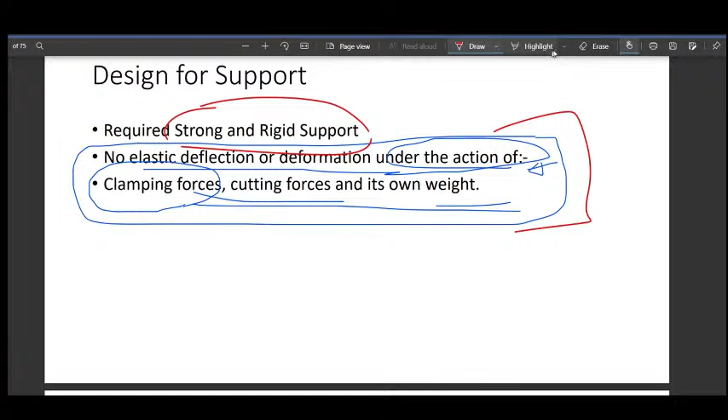Earlier we have studied about the positioning system. If someone is waiting in the lobby, please unmute and ask me to join. I accept, no one is here.

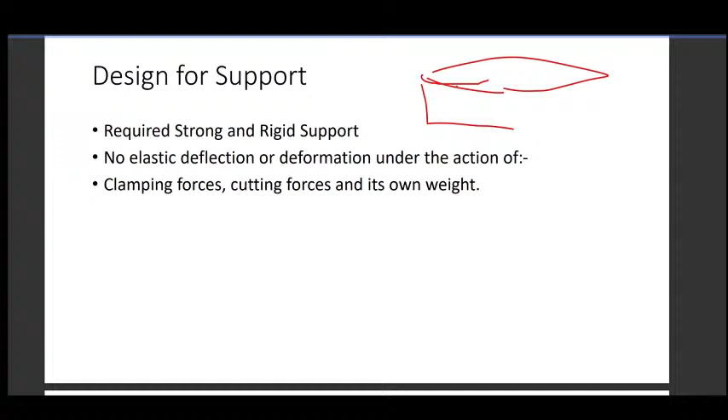So, okay, let's take it this way. When we are machining the part, obviously we have to hold it before machining. Where do we hold it? On the work table. It is not like simply we put the part and we are done. No, we have to put the part at the right position, in the right orientation.

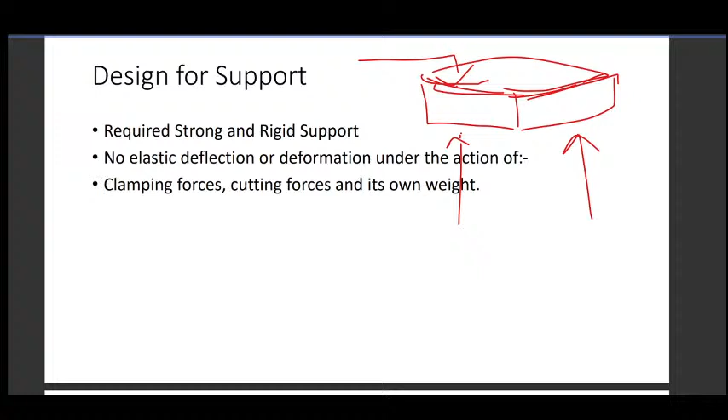We also need to have a strong and rigid support, because when we do our machining, there are cutting and clamping forces involved, and due to that, if the part is not that much rigid, it will deform or deflect. Elastic deflection or deformation under the action of cutting or clamping forces, we have to avoid. There should not be any deflection or deformation while cutting. If it is happening, we have to redesign our support system.

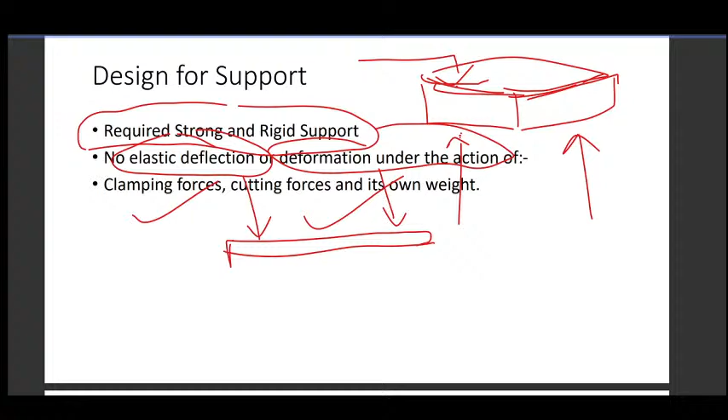That's why we need to design a strong and rigid support so that we can do our machining. Okay, so next, as we have already studied, there are some basic principles, guidelines we follow while designing the support system for a fixture.

In the fixture, the supporting at the bottom surface should be done by at least 3 points. So there are numbers of fixtures, and minimum 3 points should be there to support it. You can have more than 3 points, but you need to have a minimum of 3 points.

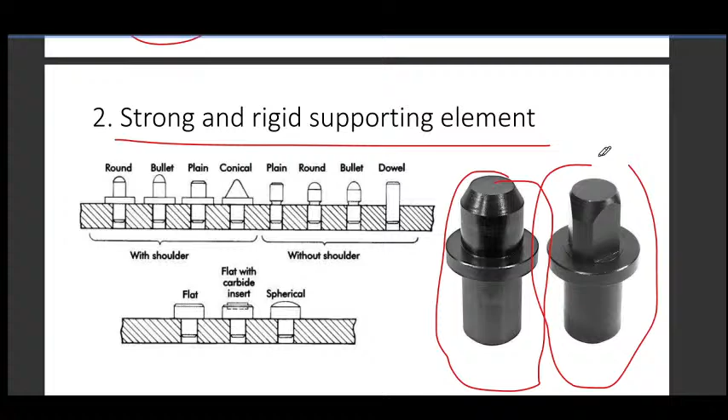Then next is, a strong and rigid support element we need to have. These are our supporting elements, pins - fixed pin and adjustable pin. They come in various shapes and sizes, with shoulder, without shoulder, and then flat, spherical.

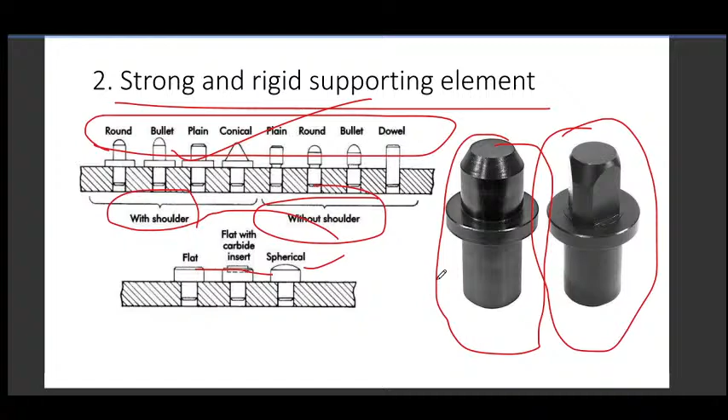So second point, strong and rigid support element we need to have. Then, unsupported span should not be large to cause sagging.

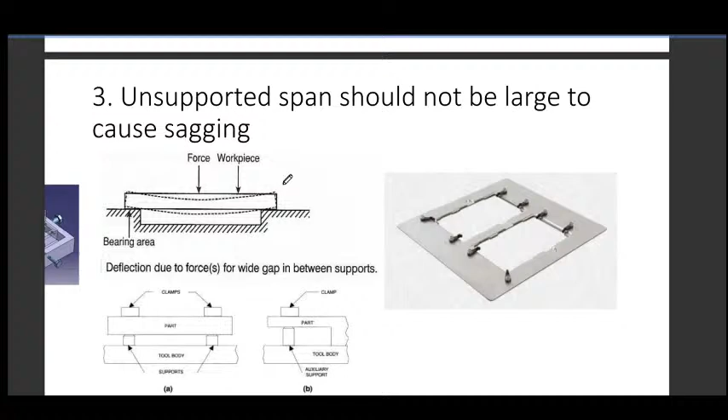There are like this - this one is small, like a PC board, printed circuit board. This one is small. But if it is large and you apply a cutting force here, sagging happens due to self weight. And again, if you are applying a cutting force, it will deform like this. So to avoid it, we need to design our support system in such a way that there should not be any deflection this way. So this is sagging due to cutting forces.

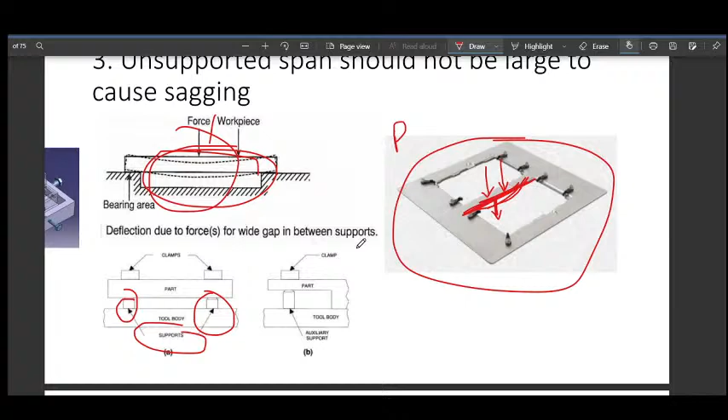So we need to put the support element pins at the right place. As you can see in this part, we have created support here, a clamp from the top. So this one is the fixture. This one is the tool body as a fixture, and this one is your workpiece. So you can see the support system here.

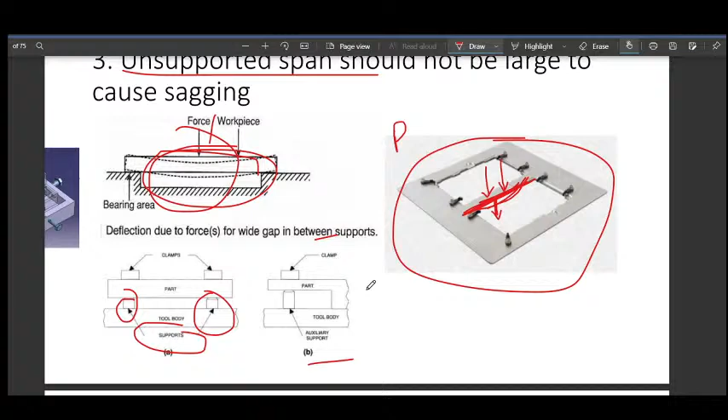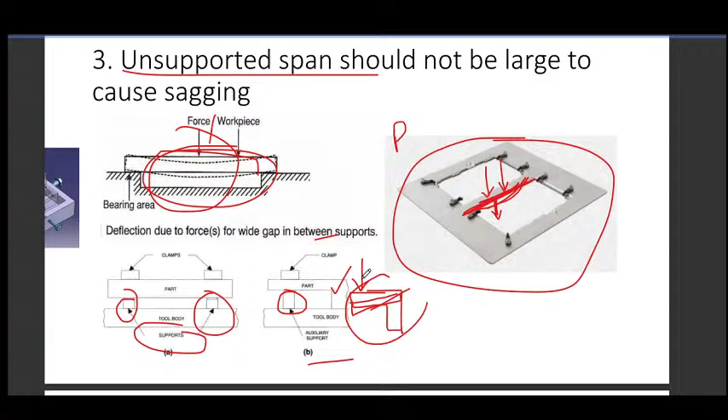Unsupported span should not cause this. If we don't support it here, what will happen? If this is the kind of your job, hanging type like this, what will happen if you don't use this support? Obviously, due to cutting forces, it will undergo deflection. So that is avoidable - we need to avoid this. That's why you need to design a strong and rigid support here.

Next, supporting should keep the blank in a stable condition. So if you have designed this way, with two supporting pins, and we are applying force here, what will happen? It is not stable. So it is not correct - unstable.

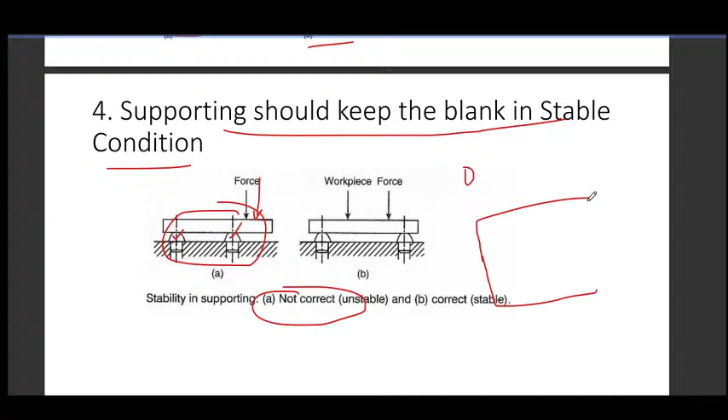And if we have redesigned our supporting pin, that is stable. If you remember, in one discussion, there was a location, a plate like this, and we had already designed it. It was two pins here and here as supporting pins, but when it was redesigned, the location of this pin was shifted to here, if you remember.

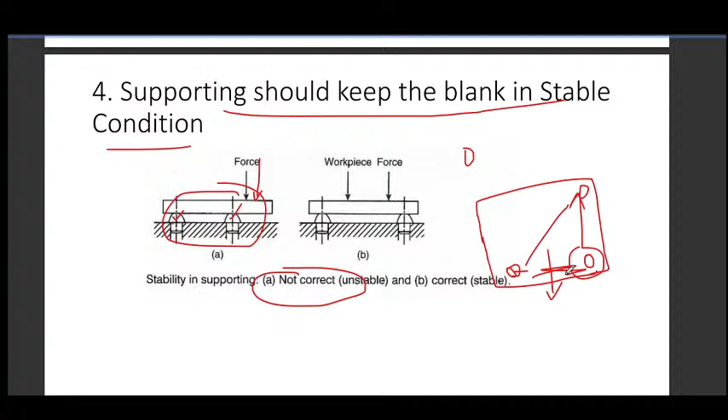So that was the concept of location of the pins - that pins should be as far apart as possible. That was the concept, that pins should not be very close, as you can see here. So this one is the correct method.

Then, a large flat area or proper recess is to be provided for better and stable support. This recess you can see, and here you can see space - that is termed as a recess - and here you can also see the space, this much gap.

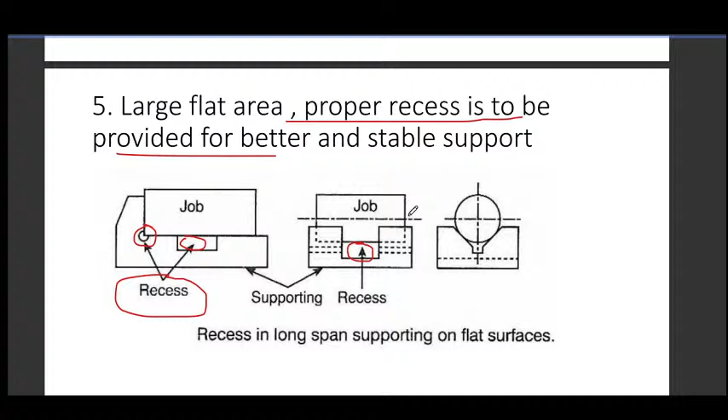Okay, so when the parts are long, you need to provide the recess, as well as when there is a flat, you need to give a recess around the corners, because sometimes the corner cannot be at a right angle, and that will cause disturbances in supporting. Because if this one is taper, suppose this one is taper, what will happen?

You know what will happen? There would be a mismatch in the dimension, location of the cutting tool, and that will cause the defect piece to be rejected.

Next, as you can see, cylindrical job should be placed on the V block. As you can see, V block, so there is a gap. What is the advantage of using a V block? It automatically aligns the central axis parallel to the V block axis.

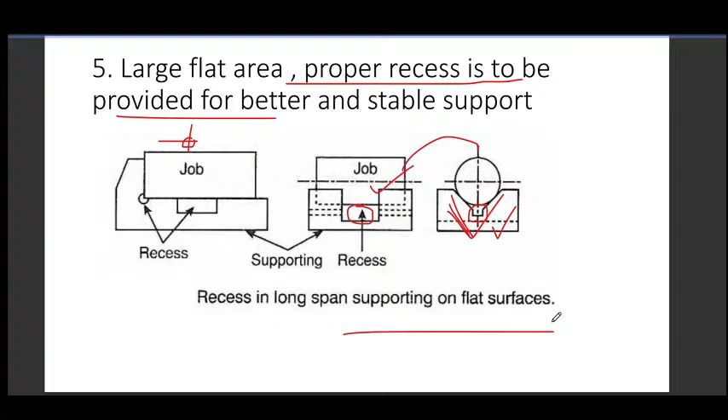Rounded cylindrical workpieces should be supported on a V block. As you can see, this one is a V block as a vice. V block, clamp with the vice.

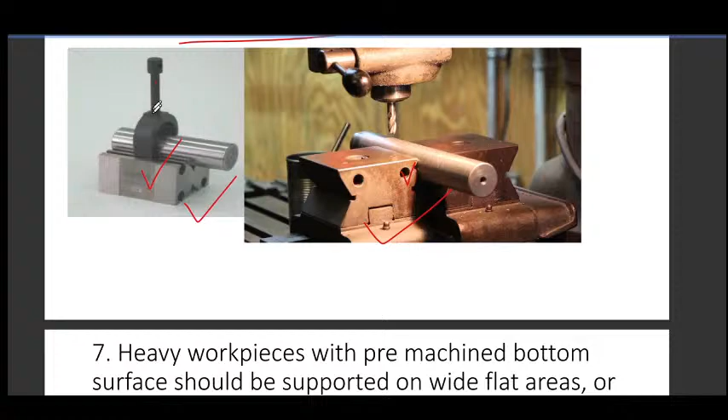Next, as you can see, a heavy workpiece with a pre-machined bottom surface should be supported on wide flat areas or on flat-ended strong pins or plug. As you can see, if the part is flat, it should be supported on this.

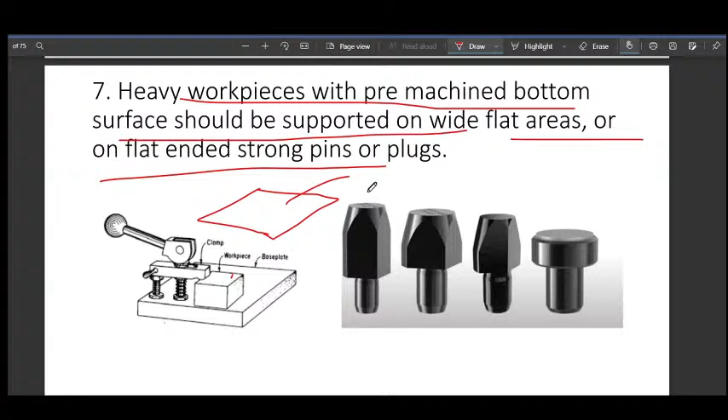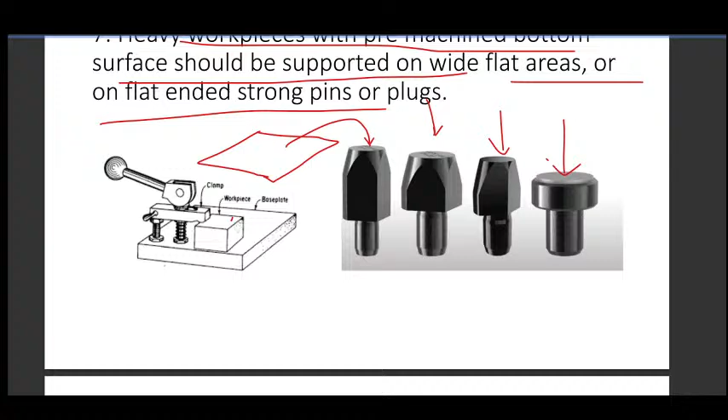It should be supported on the flat end of the supporting pins. So it's not only flat, it should be wide, not small. We should avoid something like this because the top is very small, so it should be wide.

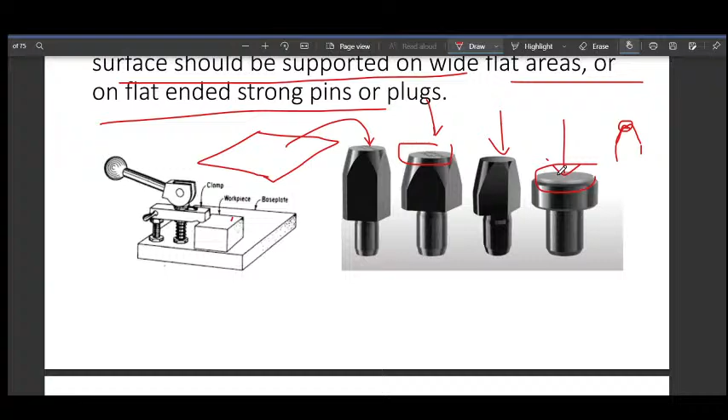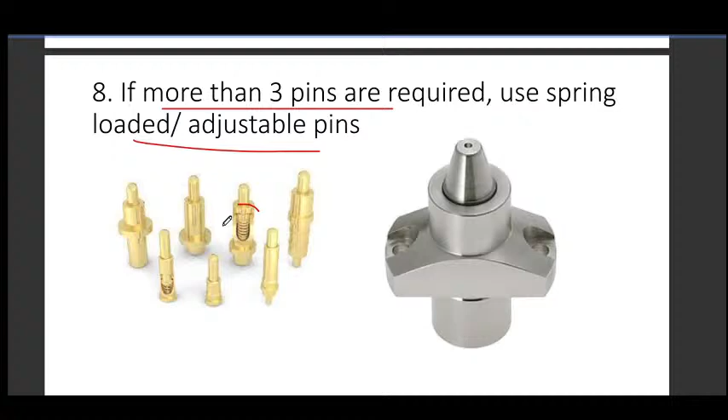Then if more than 3 pins are required, use spring loaded adjustable pins. This is, as you can see, spring loaded adjustable pins. The same thing I have shown here, spring loaded. What is the advantage? This can give you the ability to adjust the position of the workpiece. So spring loaded or adjustable pins are advantageous when there are parts of varying size.

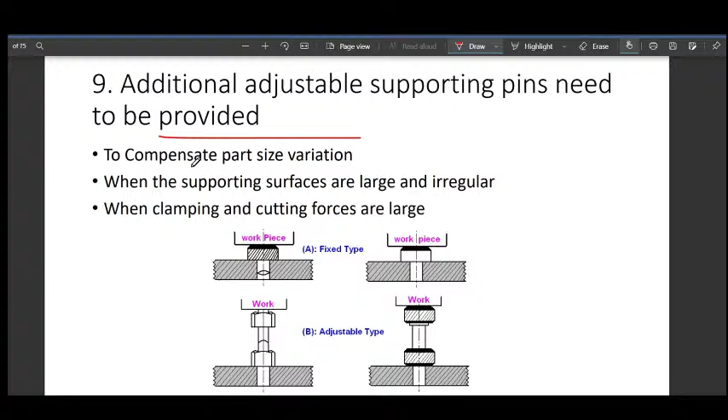Adjustable supporting pins need to be provided to compensate for part size variation, because if one part is longer and one is shorter, how do you support two different parts of different sizes with the same fixture? That's why adjustable supporting pins are used. When the supporting surfaces are large and irregular, obviously we cannot have a fixed pin, so adjustable should be there.

And when clamping and cutting forces are large, when you do machining and the cutting force is very high, you need adjustable pins so they can accommodate the shock provided by the cutting tool. If cutting forces are very high, the adjustable pin can absorb it.

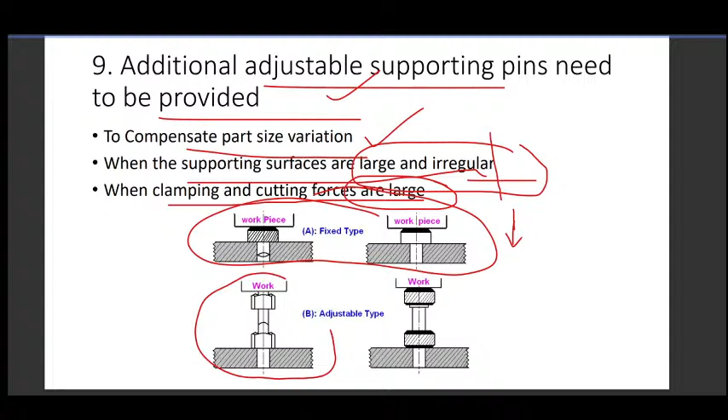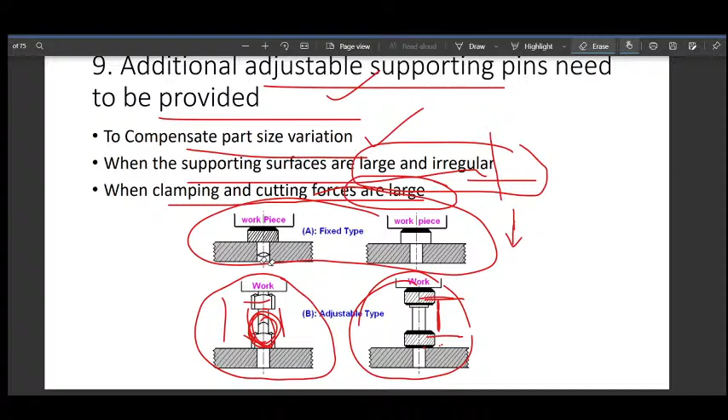As you can see, at the top this one is fixed type, and this one you can see is adjustable type at the bottom side. These two are adjustable; we can simply rotate it using these two screws and change the height of these two top flat ends. Here again we can rotate this nut and simply change the height. It is like a concentric cylinder mating inside, and when we rotate it like this, it will move and change the position of the top flat end. I hope it is clear.

Then ring or disc type jobs should be mounted on the mandrel. As you can understand, if the cylinder type job is there, this should be mounted on the mandrel. That's why ring or disc type jobs should have our mandrel for this type of job.

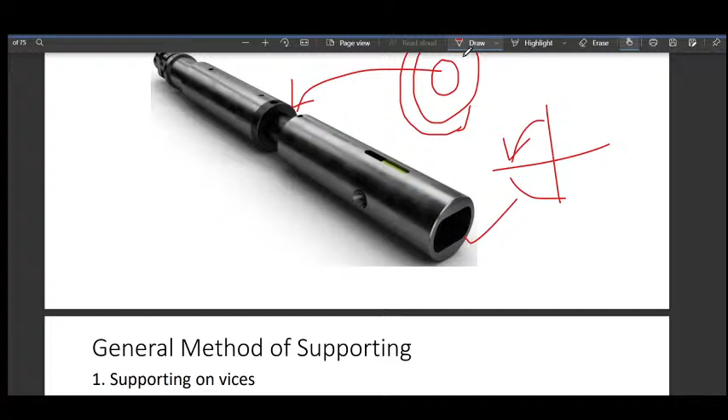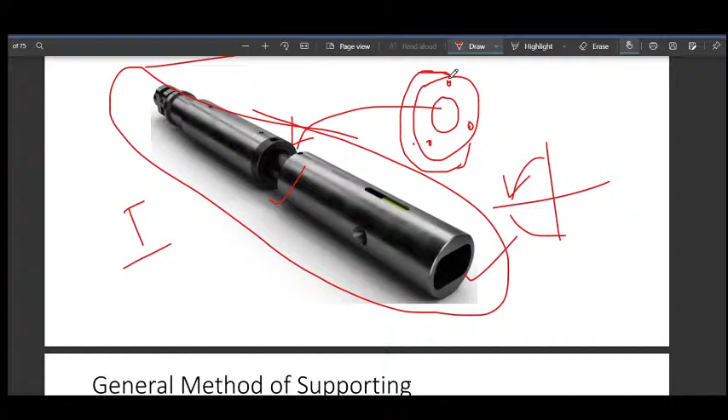Next, this one is a special kind of indexing mandrel that can rotate at an angular position like 90 degrees, or if you have to drill say 3 holes here, here and here, we can easily rotate it. I took this picture for the indexing mandrel, it's not given for how many holes specifically; I am just stating the example that a mandrel can be used for indexing. Like if you have to drill 3 holes, the mandrel gives you the opportunity to rotate the part 120 degrees for each hole, in a single step.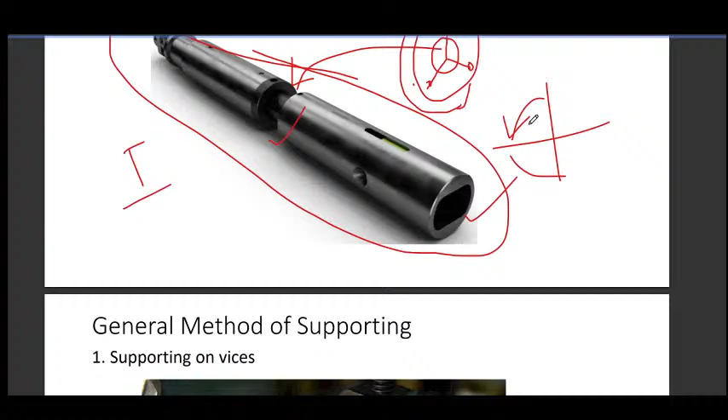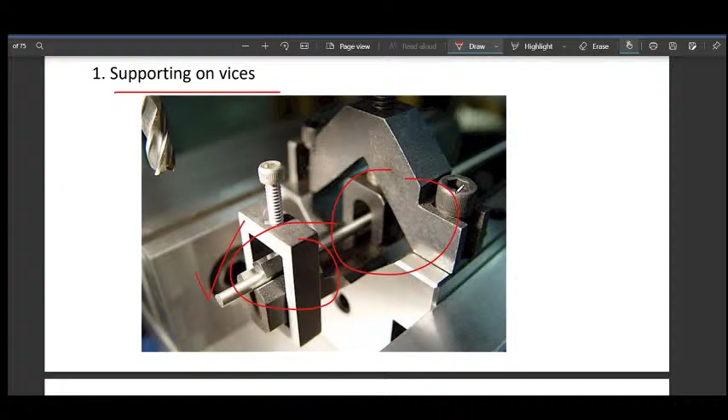Next is the general method of supporting. Again, supporting on vices. Cylindrical parts should be supported on vices or V-blocks. The same parts can be supported on vices. You can see we can simply unscrew this one, then the job is open and we can take out our part.

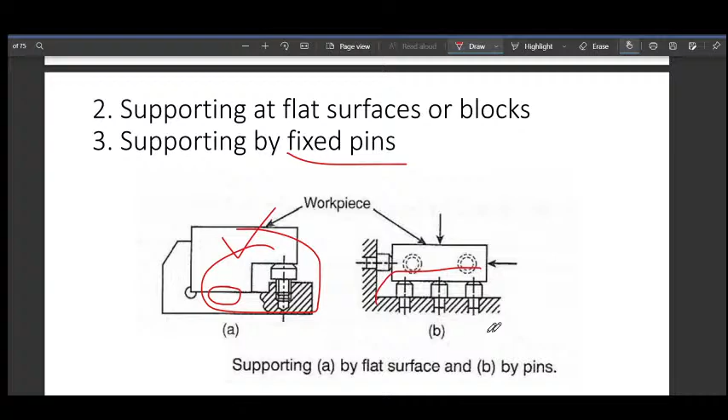Then supporting at flat surfaces or blocks, and supporting by fixed pins. So flat surfaces you can see this one, and by fixed pin you can see this one. And when we are using this one, you can easily remember the recess and adjustable pin.

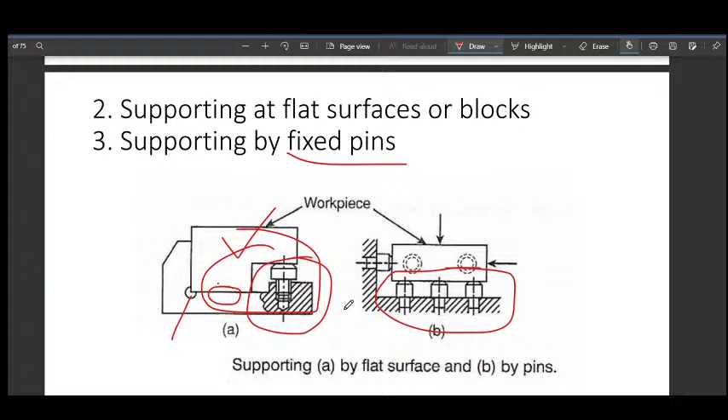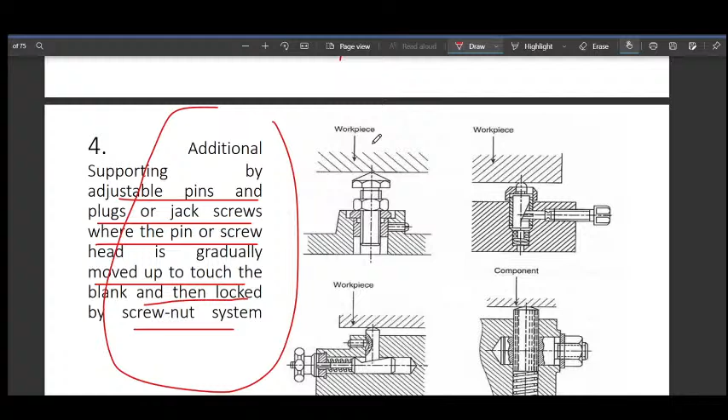Additional support adjustable pins and plugs or jack screws where the pin or screw head is gradually moved up to touch the blank and lock the screw nut system. When we use an adjustable system, it should be such that we can change the position, because that's how we achieve the adjusting position of the workpiece.

Suppose this workpiece comes to one length, another workpiece comes to a different length. How do we accommodate this variation? To accommodate it, we simply use this straight head. You put a straight screwdriver and rotate it. It will come out and this will go down, so the top of the pin will go down. We can adjust it.

Another way we can do this: here we also have this nut. If we have to set it to the right position, after setting the nut at the right position, we will lock it through here. This nut adjusts the position. We will open it or close it. When we open it, the screw can move up or down, and with the nut we can lock and set the height.

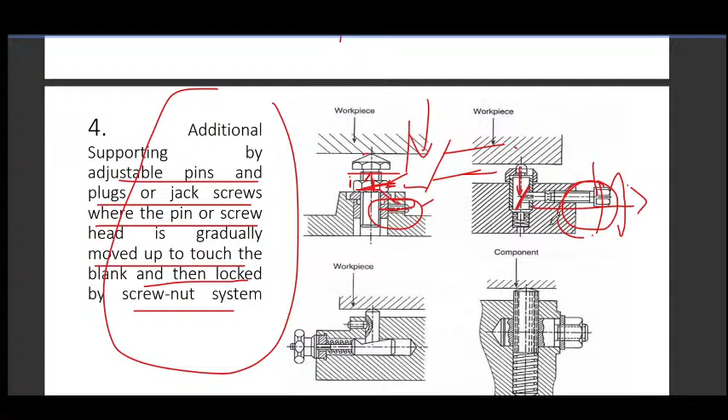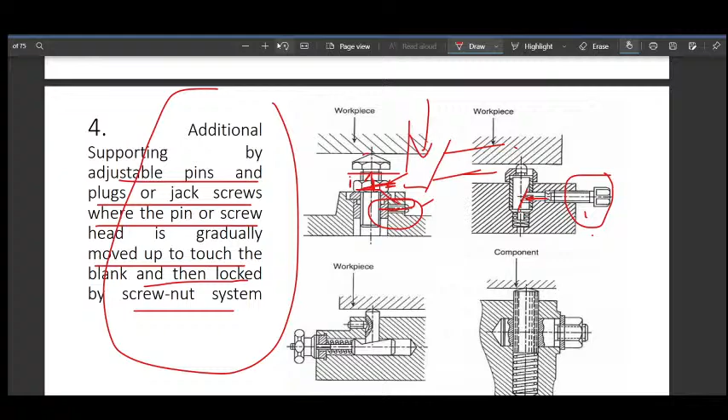So what we are doing is screwing or unscrewing it, and this causes it to move in this direction. When it moves, due to this taper -- let me zoom in -- as you can see this taper line, it forces the pin to go up or down as per our requirement. When it goes up, the head of the pin goes up, and when it goes down this way, it goes downward. That is the advantage of having this slide type mechanism with this taper shape.

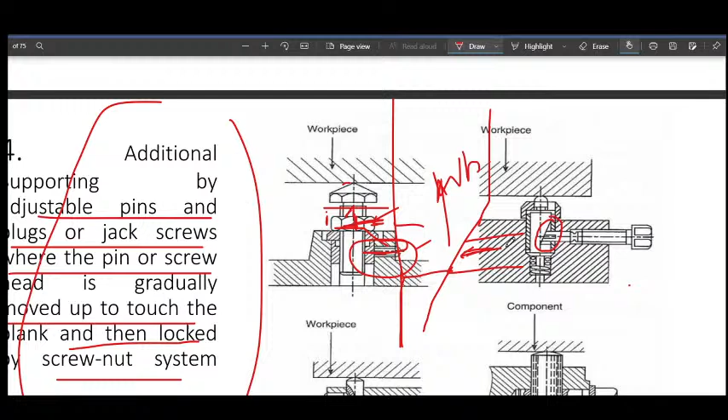So here we have the workpiece size. The pin is like this, so when it goes down this way, it forces us to set the pin location upward, or when we take it this way, we can set the pin location downward. I hope it is clear.

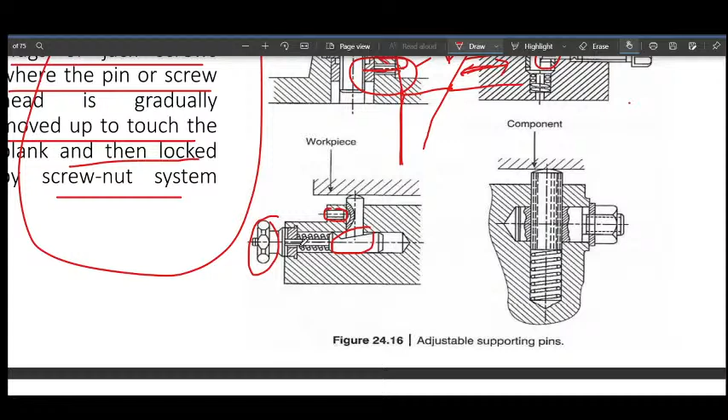Again, same concept, this taper mechanism. We will unlock it here as well as here with this spring loaded handle. We can simply move it this way or this way. If we move this way, the taper side comes this way, and due to increase in diameter, it forces the pin to go up, and here we can use it to lock the pin. Again, we can unlock this nut, and then due to the thread mechanism, when we unscrew it, the pin will go up or down.

So these are the concepts of adjustable pins, various ways we can use these pins.

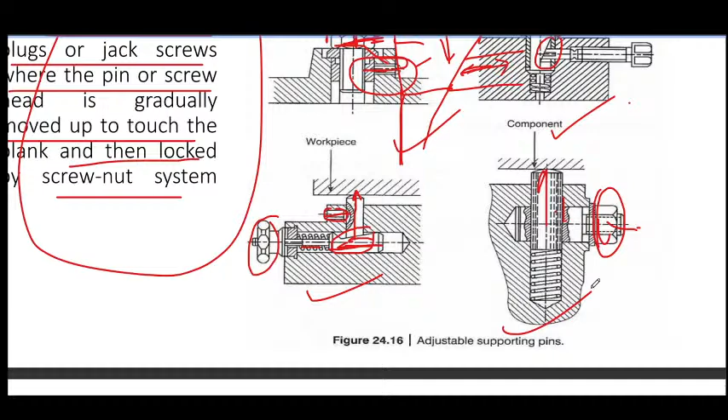So next is supporting and locating on V block. As you can see, the V block has a graded scale and mandrel. We can use it for cylindrical and disc type jobs.

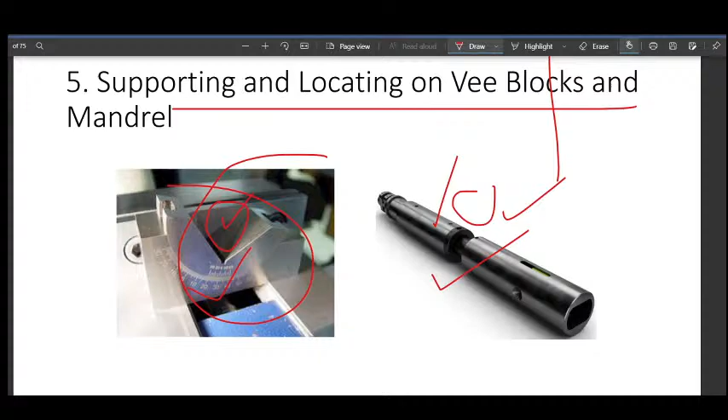Next is design for clamping. After design for location and design for support, we need to design our clamping system. Why? Because as we have seen in 3-2-1 location, we were able to check only 9 positions, where plus X, plus Y, and plus Z translation directions were left unchecked, free at that time. Those three translations will be checked and stopped by clamping. So we will achieve the clamping.

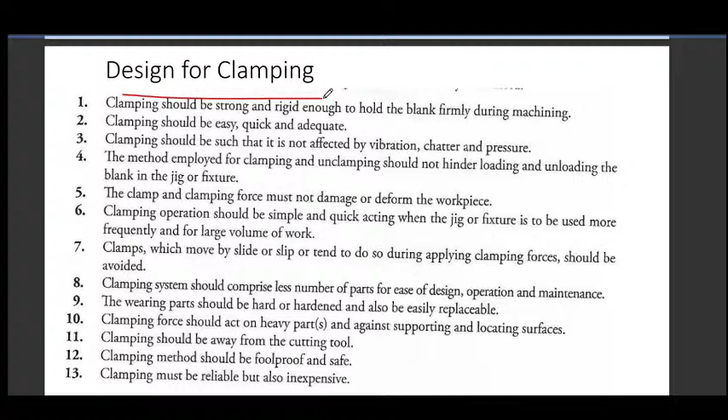What are the various guidelines? These are the guidelines: the clamping should be strong and rigid enough, hold the blank firmly -- correct. The clamping should be easy, quick, and adequate. It should not consume more time, and it should be simple in operation. Clamping should be such that it is not affected by vibration, chatter, or pressure.

When we are doing the machining operation, vibration, tool chatter, and pressure will be there, so clamping should not be affected. Otherwise, what will happen? There will be losing the grip, and the part will deflect by a small distance, and that will lead to part defect.

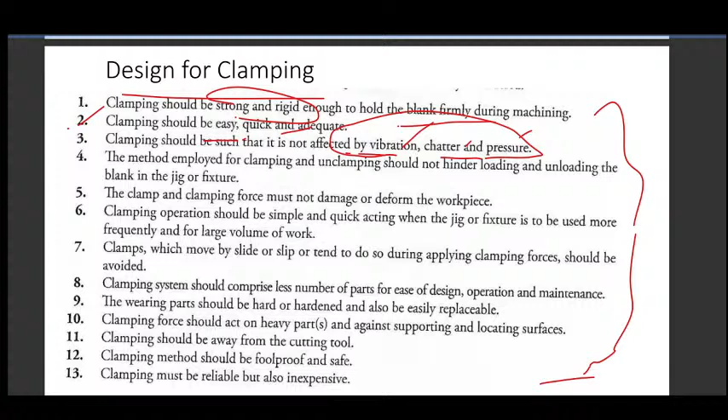Then, the method employed for clamping and unclamping should not hinder the loading and unloading of the blank in the jig or fixture. Whatever method we are using for clamping, it should not hinder our loading or unloading. Then clamping and clamping force must not damage or deform the workpiece, as we have seen with clamping forces.

Obviously it applies force on the workpiece also, because we have to fix the part, and it should not deform or damage the workpiece if a delicate workpiece is there. If the workpiece is rigid, then no problem, there is no talk about this point.

The clamping operation should be simple and quick acting when the jig or fixture is to be used more frequently and for large volume of work. Like it is stating that when we have to go for large volume of production, it should be very quick. Means simply in one or two steps we can unlock it.

Like in the previous talk, we have seen that there were screws, there were nuts. We have to unlock it, and then we have to remove the part. It is time taking, and we need to avoid it. So it should be simple and quick acting because we have to work with large volume.

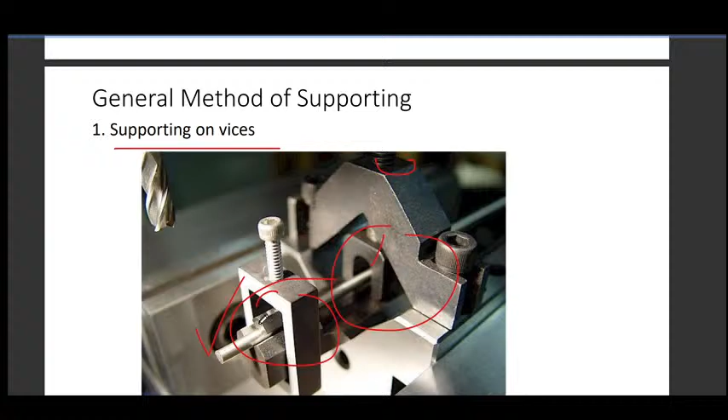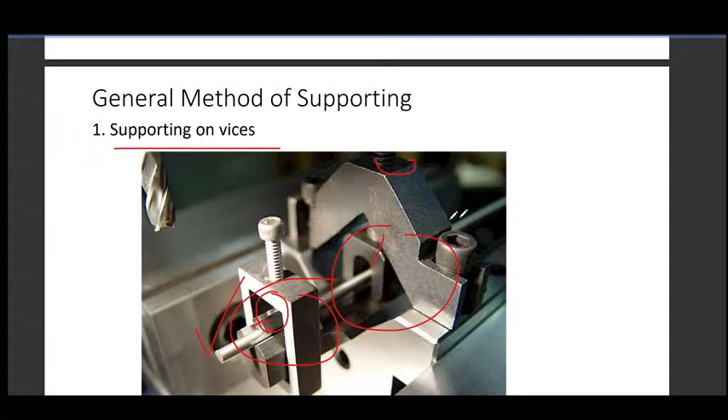Then clamps which move by slide or slip or tend to do so during applying clamping forces should be avoided. Like here, this type, if you are clamping it this way, there is a chance of sliding. But what we have done here, we have used a V block. And in the V block, if we are using the jaw in the V block, then it is fixed. It will not slide. First, we should try to avoid it. If we cannot avoid, then we should control it.

Clamping system should comprise less number of parts for ease of design, operation, and maintenance. It means we should design our clamping system having the minimum number of parts. Then wearing parts should be hard or hardened and also be easily replaceable. Those parts which are going under wear should first be hard enough so that there is less wear, and if it is going under wear, it should be replaced easily. It means it should be available easily, available as well as setting the part in the fixture also.

Clamping force should not act on heavy parts and against supporting and locating surfaces. So as you can see, the clamping force should not act on heavy parts. No, sorry. The clamping force should act on heavy parts and against supporting and locating surfaces. It is the same way that, wait a minute.

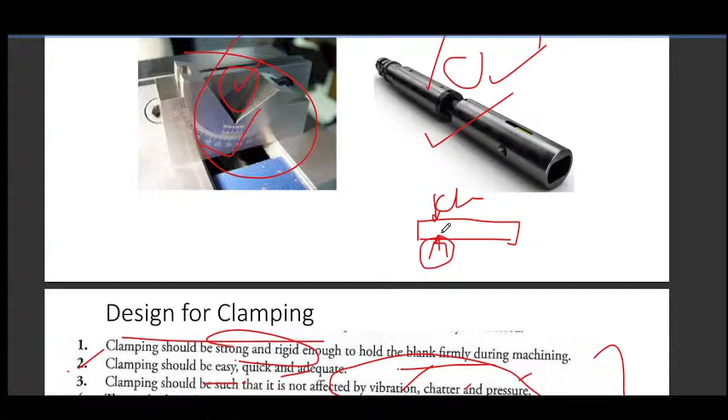You use a supporting pin here, and see this one is the part side, and your clamping head should come right above the supporting pin in this way. This one is the clamping force and your supporting system. So it is like this. The clamping force should act on heavy parts and against supporting and locating surfaces. It means it should be against them, the same way I told.

Then clamping should be away from the cutting tool. It means if it is near the cutting tool, it will hinder our cutting operation. So we should avoid, while designing the fixture, that clamping is near the cutting area. Then the clamping method should be foolproof and safe. Obviously, whatever we are going for in clamping, it should be foolproof. It should be checked and it should be safe.

Clamping must be reliable but also inexpensive. Obviously, if it is costly, then it will lead to an increase in the cost of the product. So it should be reliable as well as inexpensive, less costly.

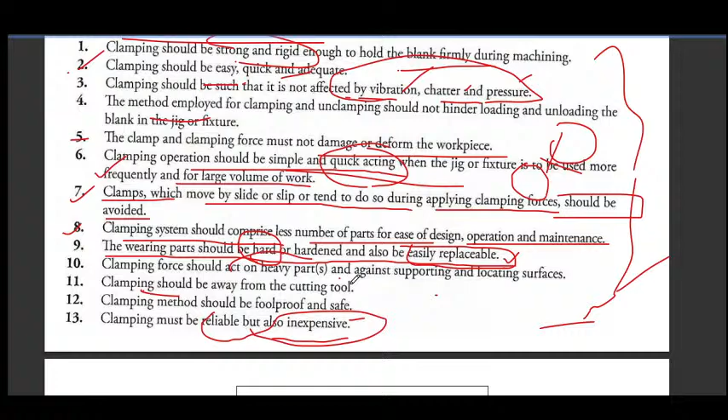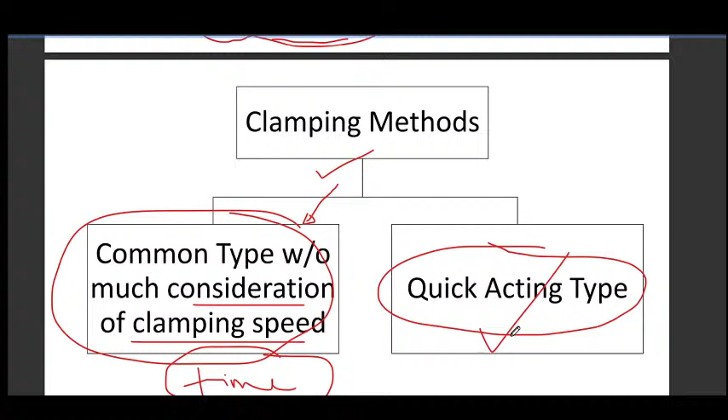So again, what are the various clamping methods? Based on the application, there are two types of clamping methods. Common type, where there is not much consideration of clamping speed, or in other sense, the time and force requirement. You don't need to consider especially the time requirement. Here, the time requirement is very important. So in the two categories, here it will consume a bit of time, so speed is slow. Here, quick acting, in one or two steps you can remove the part, but here it will take more time.

So in the common type or general type, first is the screw operated strap clamps, that is called the under strap type. So you can see this one is the workpiece, and you can see the spring loaded mechanism, and here the strap, you can see the clamping bar. You will simply unclamp the clamping knob, and after unclamping the clamping knob, you can move this clamping bar upward, and the clamping force is removed and you can take the part out.

Let me explain you once again. Here you can see this one is a fixed pin, so it will not go this way. Reason is because due to cutting, the workpiece also applies force, and there is a possibility for this clamping bar to go upward. But as it is a fixed bar, a single body, with this pillar pin or supporting pin here, this height is fixed, it will not move again.

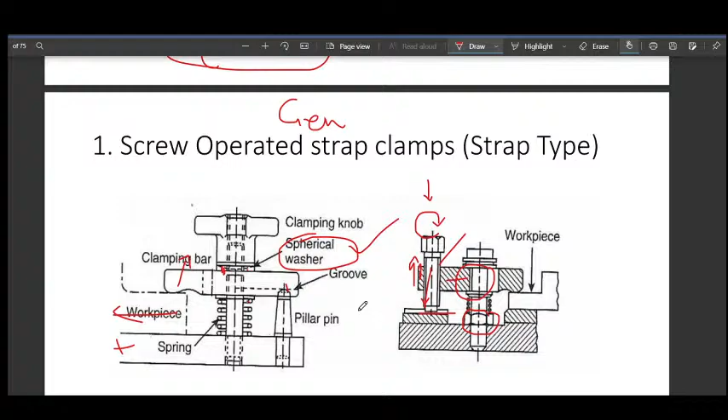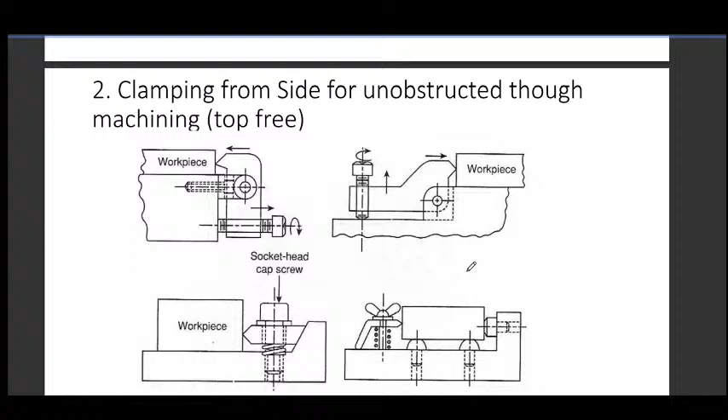Clamping from side for unobstructed through machining. So as you can see from all these diagrams, when we have to do machining work at the top, we cannot clamp it from the top. So what are the other options? To clamp it from the sideways. This sideway clamping will facilitate us to lock the position in plus x and plus y direction. And now you can understand that we have achieved the 12 degrees of freedom. 3 were left, z, x and y.

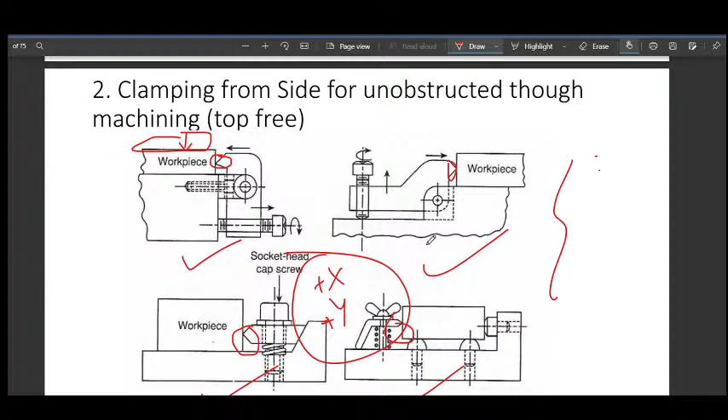So how do we achieve the locking mechanism? Let me explain you here. See what we have again here, it is fulcrum type. We have a pin here, so we can set the position of the fulcrum with respect to this body of the fixture. So this pin will go in this way so that we can adjust our position.

Now see here, as it has the fulcrum mechanism, if we rotate the head of the screw in this way, what will happen? It will come out. See, when we are rotating it clockwise, it will come out. So when it will come out, wait a minute, the concept is simple. There would be a relative motion, and if this one is going this side, it will go this side.

Okay, so when you rotate this one, when we observe it from this side, the rotation is this way, counterclockwise. No, sorry, in this particular case the rotation is clockwise. So in clockwise this will go, since it cannot go inside, so obviously this part will come this way. We are rotating it clockwise and we are observing from here.

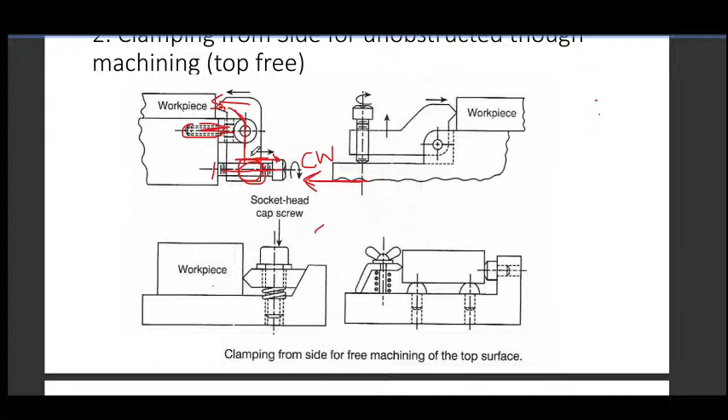So in rotation, there is only relative motion between threads, and that relative motion will cause the position of the fulcrum, or you can say strap or clamping bar, to shift. There should be relative motion, so you turn clockwise, it will come this way and you can lock it. It will force the workpiece from the side.

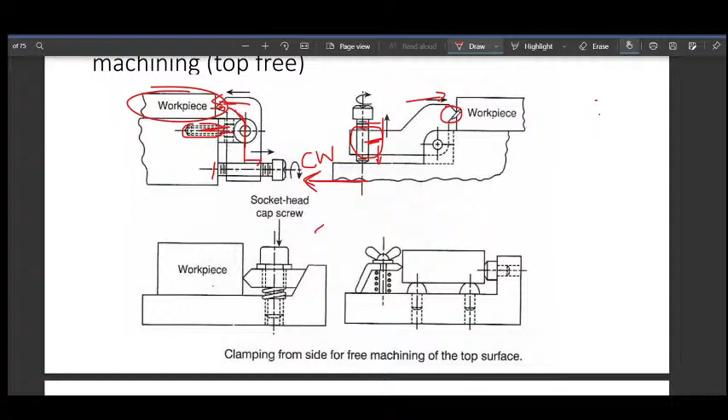Again, another method, this one is very quick. You can see, simply here you can turn it and it will change the relative position between the clamping bar and this screw. So if you are turning and this clamping bar is going down, it will loosen the workpiece, and if the clamping bar is coming up, it will grip the workpiece. Again, this is the fulcrum of the clamping bar.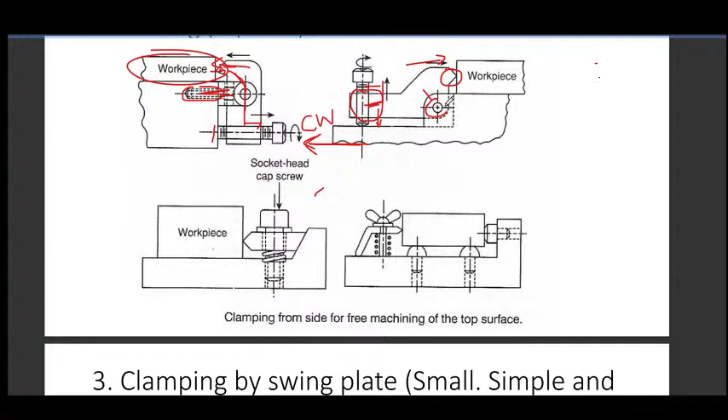Then we have socket head cap screw. Again, simply we put our spline key here. Spline key, because socket head means it has a groove here on the top of this head. So to open or close it, we need a spline key.

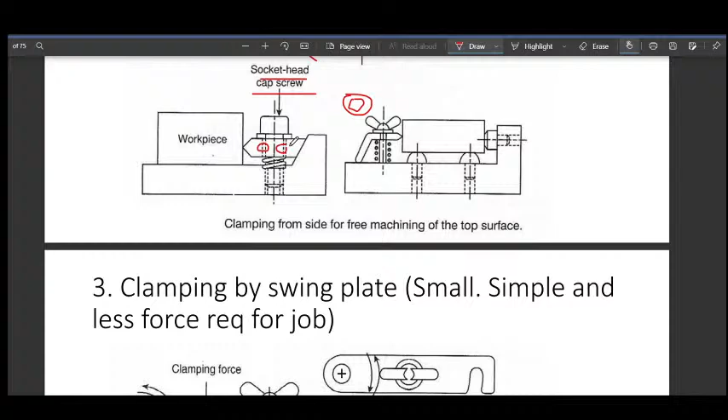Again you can see the dotted line indicates there is a thread. So the thread is an internal thread in this bar and an external thread on the screw. And here you can see a spring has also been used. So when you turn or rotate it, what will happen? It will cause relative motion between the clamping bar and screw, and with that relative motion it will come down, and when it comes down, obviously it will apply more force.

And you can see this one is a wing nut. Simply unlock it quickly by hand, put this clamping bar and lock it. So all these methods are clamping from the sides.

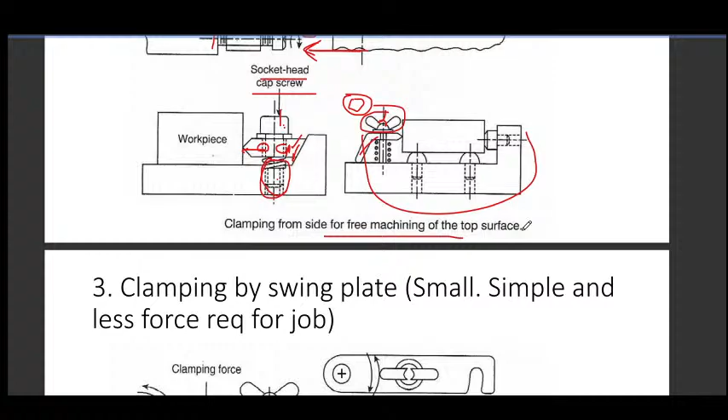Next is clamping by swing plate. That is used generally when we are dealing with small size, simple parts, and where less forces are required in the machining operation or clamping operation. So we should go for this. So simply what we have is this wing nut, we will turn it, okay, and let me tell you a bit.

Let me discuss this one. See what we have here. Here we have a fulcrum point, and here we have this lock arrangement and this wing nut. So when we unlock this wing nut, we will take out this part, not completely outside, because we only need to loosen the grip to remove the part.

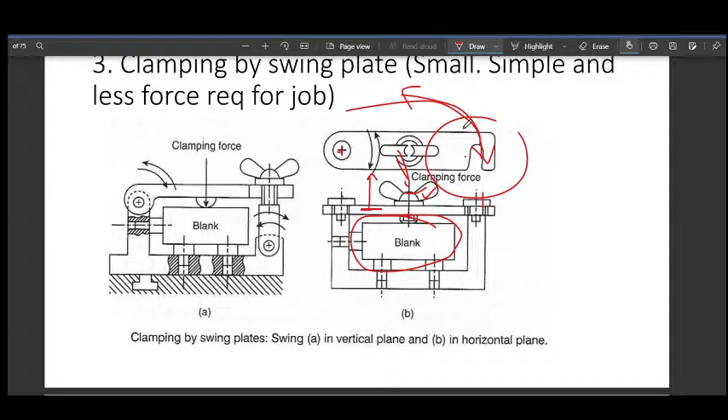And the same way we have to lock it. We have to bring it back, lock it here and put the pin here. And the same concept has been used here. I am drawing the top view; it has this type of shape in the top view, this strap. So you loosen the wing nut, you can take this bar down, and then you can take this clamping bar upward.

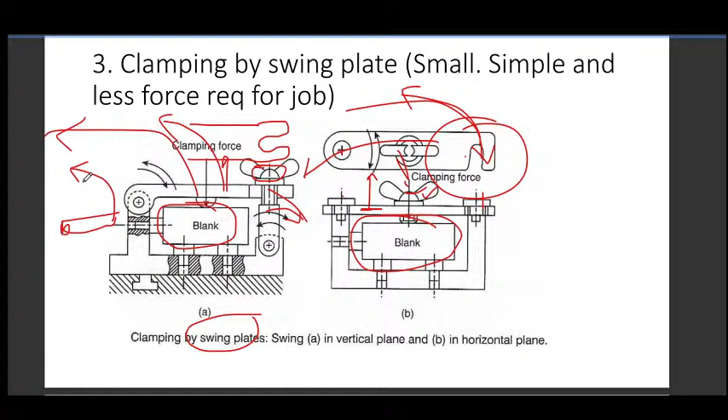So it is like you are taking one part down and one part upward, and you have taken it this way and your part is free to take out. So what we are applying is a swing mechanism. From this position of the clamping bar, it means we are swinging the clamping bar to unload the part.

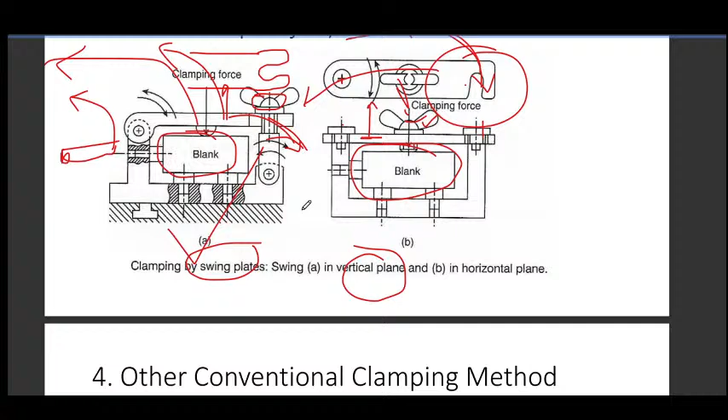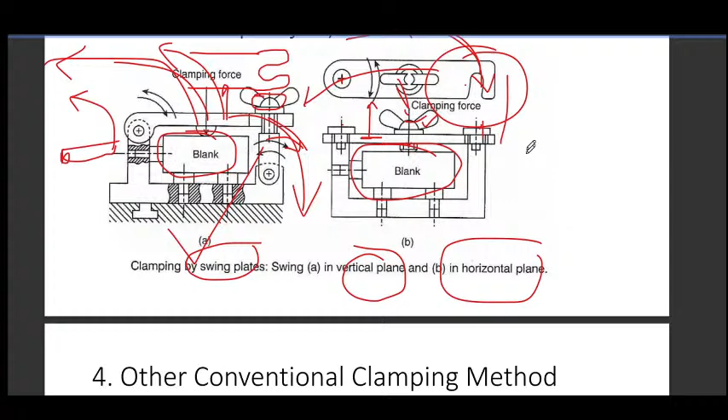So this one is a swing mechanism in the vertical plane, as we have seen that this part is coming down and this one was going upward, and this one is the horizontal plane. As you can see, only horizontal movement of the clamping bar.

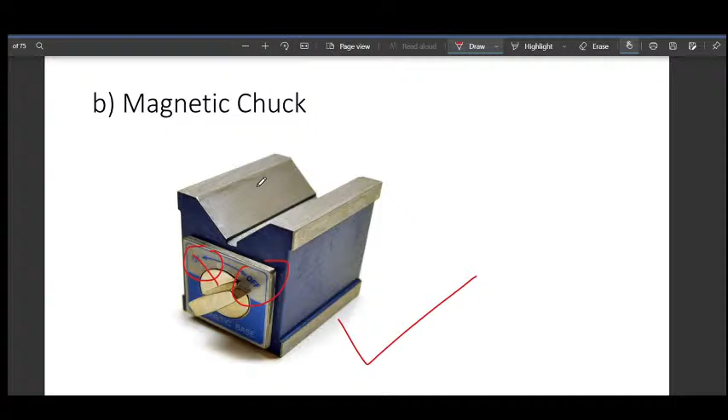Other conventional clamping methods are vices, like for drilling and milling. We can lock it on the vices. Then we have the magnetic chuck. You can see on, off, currently at the off position. You turn it on and this will hold the parts. So magnetic chuck.

There is a mechanism: when we supply electricity, it will produce a magnetic field. The whole body will be magnetized, and you cannot remove the part without turning it off. It has very high magnetic force. Probably you should see it in your lab if you get time.

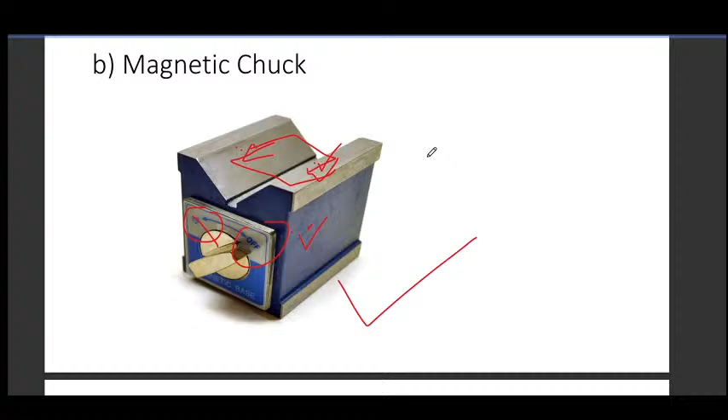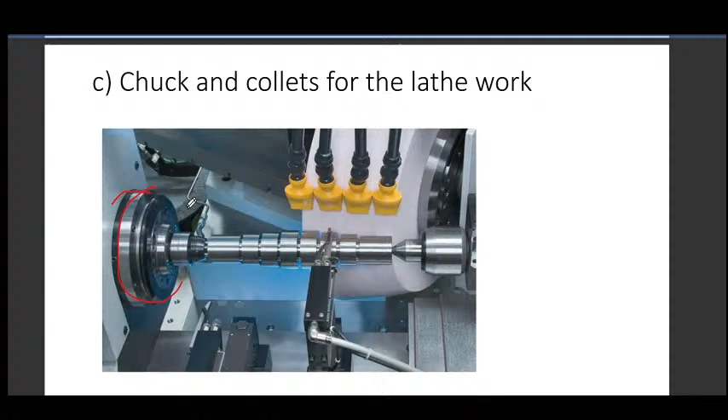Then chuck and collet for lathe work. As you can see, in lathe work you are working with different diameters. So you will have the chuck and collets for lathe type work. And so here I have completed this part. Only a small part is left in clamping methods.